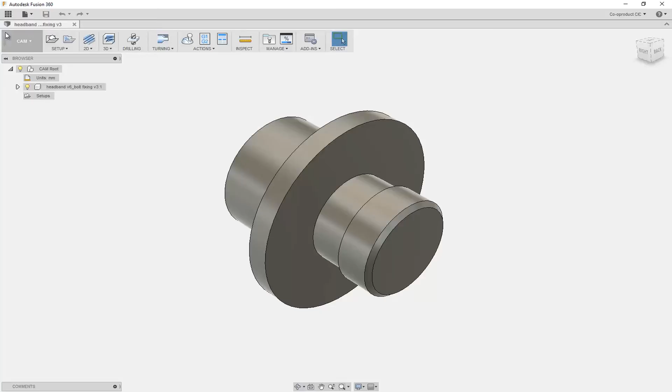jet cutting. So we're going to go to Setup, and in the operation type we're going to select turning. When we do that, we can see that there's a round surface here, which means that we've got the right operation set up. But our fixing isn't in the right orientation, so we're going to create the Z-axis so it knows where the Z-axis is. So we just need to click on the front of the part and then make sure that the Z-axis is pointing in this direction, so the tool movement is pointing away from the job.

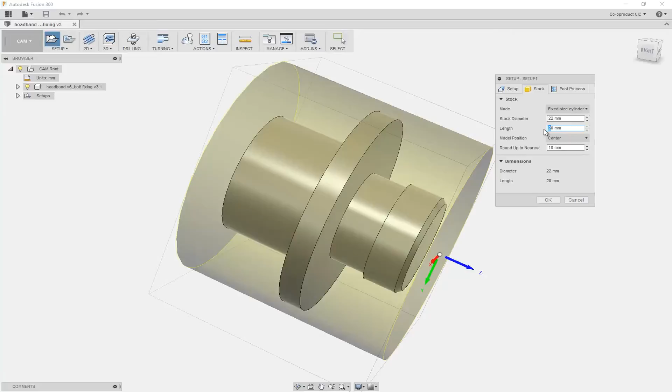So we need to change the stock diameter to 22 millimeters and then change the length of the stock to 40 millimeters so that we've got enough stock to hold in the chuck when we're using the lathe. And we're going to place the model position and offset it from the back with a 1 millimeter offset, which means that we know that the front of our part is here and we've got a millimeter extra material in front, so that when we face it off we'll get a nice clean front face.

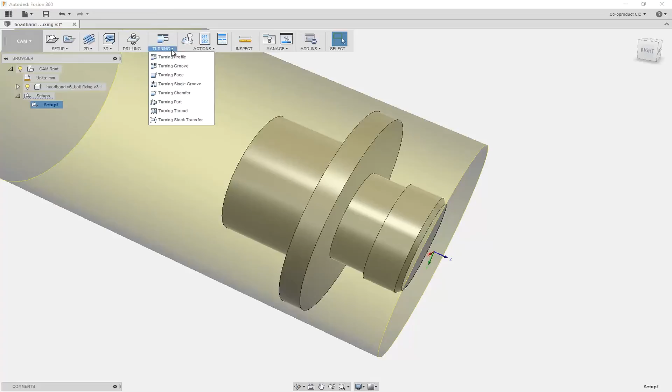What we can now do is add our first operation, which is a turning operation, and we're going to face off the front of the part here. Now, we don't really need to tell Fusion to do much because it understands where the part is. All we need to do is select the right tool, and I'm selecting a 0.8 millimeter turning tool. The next thing we want to do, if we wish, is to set the spindle speed according to the material or the feedstock that we have. So I'm going to set this to 1000 RPM, which is a good speed for the operation that we want to do using the material that we're using, and then click OK.

Now straight away in Fusion 360 CAM environment we can simulate the operation. So if we go over to the browser, right click on our first operation and then select simulate, then go down and click play to start the simulation, and we can see it's just done that facing off operation. And we can close the dialog window.

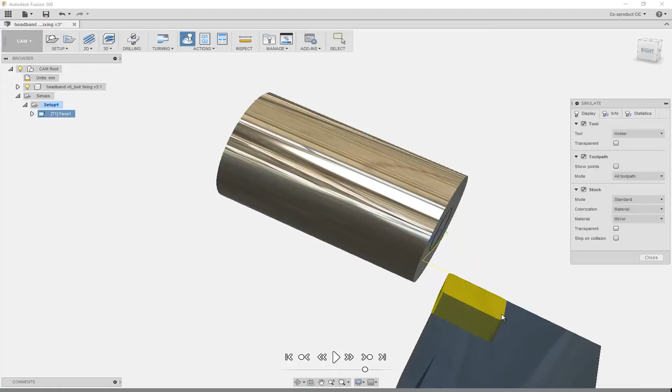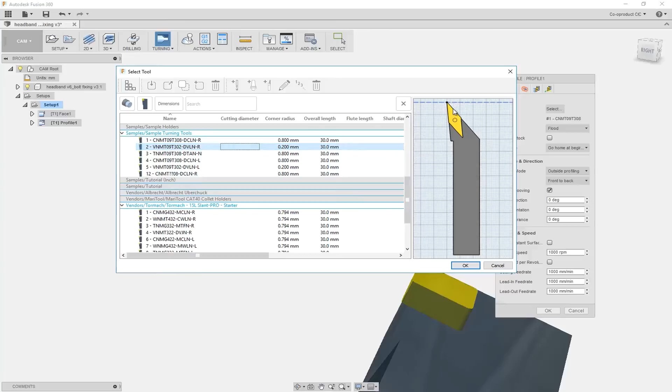So now we're going to add our second turning operation, which is a turning profile operation. Now we only want to cut the profile from this surface to this surface. But I am going to change the tool. I'm going to go for a slightly finer tool, a 0.2 millimeter turning tool, which gives us a little bit more clearance. We could change the geometry, and I'm going to confine the area that we're going to machine. So I'm going to select this face and then this edge. So that means that we're only able to machine between those two edges.

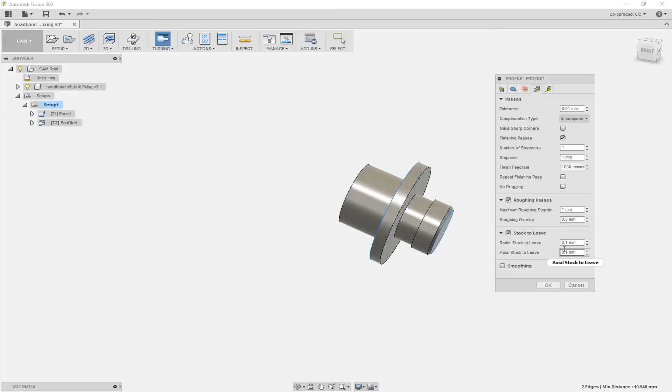For our passes, we're going to make sure that we leave some stock. We're going to leave 0.1 millimeters of stock on the diameter because we're going to run a rough pass with this operation, which will follow with a finishing pass on the next operation to give us a really fine finish. Click OK and it's done, and you can see the line, the yellow line where the tool paths are going to go.

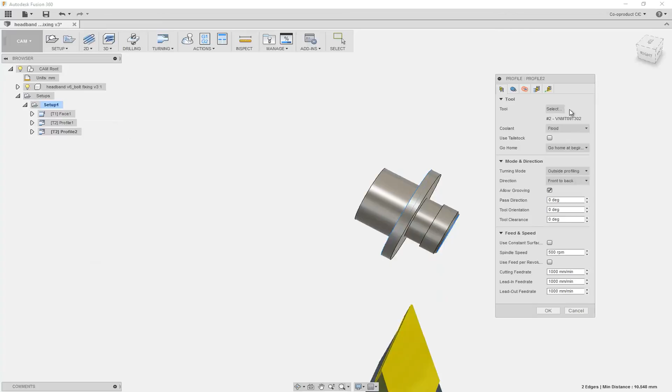So to create the finishing cut on this profile, if we right click our second turning operation in the browser, create a derived operation and then turning profile, we can keep all of the parameters that we've got here. And if we just click on the passes and turn off the roughing pass, don't leave any stock, that'll give us our final finish on this profile. And here you can see the yellow line that shows the final finish profile cut.

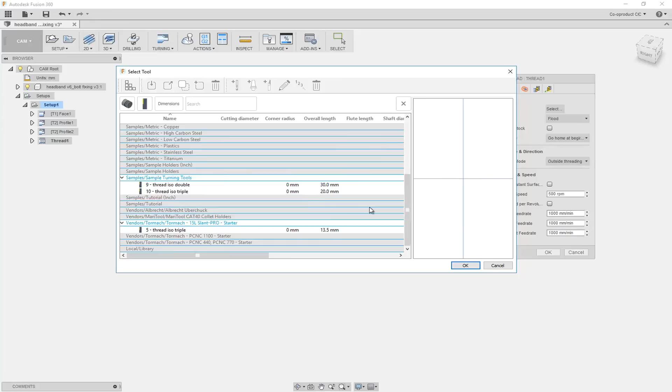So the next thing that we want to do is we want to add a thread. So if we click turning and then turning thread, and we want to add a thread here at the end on that face there. So what we need to do is select a threading tool. So we can add a triple 20 millimeter ISO threading tool here and then click OK. And then if we click geometry, we need to tell Fusion what to thread. So we click that surface and we can tell Fusion that that surface needs a thread on it. At the moment it's got a 0 offset on the backside stock offset. So we need to increase that by 1 millimeter so that the thread doesn't stop too short.

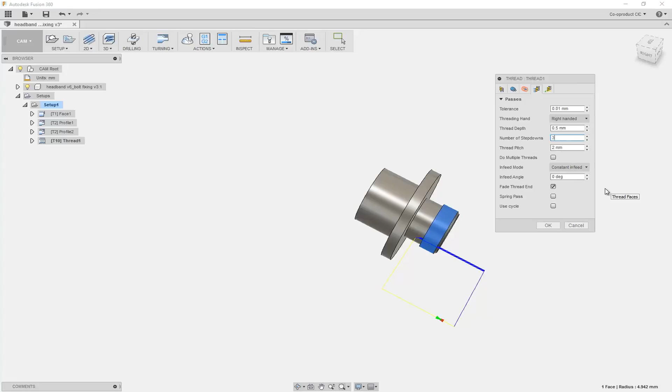If we click the passes tab, we can make some changes here. And I want the thread depth to be 0.5 millimeters, and I only want it to pass 3 times. So I want the thread to be cut over 3 passes rather than 5. I'm happy with all the other settings, so I'll just click OK.

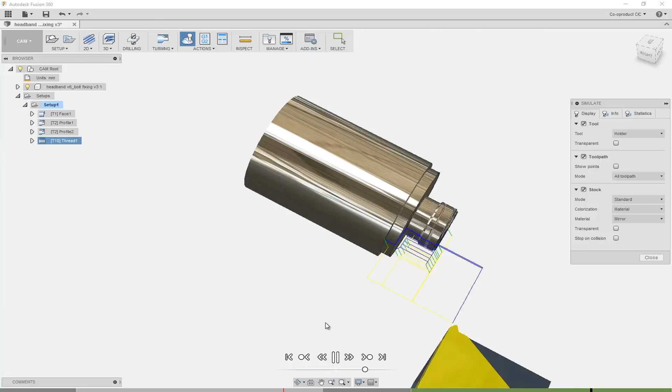So we've got 4 operations at the moment. We've got 3 turning processes and then 1 threading process. If I right click on Setup, I can simulate all of them. So that's the facing off, and now it's rough cutting the profile, the final finishing cut, and then 3 passes for the thread. 1, 2, 3, and that's the operations complete.

In the next video we'll deal with the other side by cutting out the groove, then parting off the material, and also look at post-processing and producing a setup sheet.